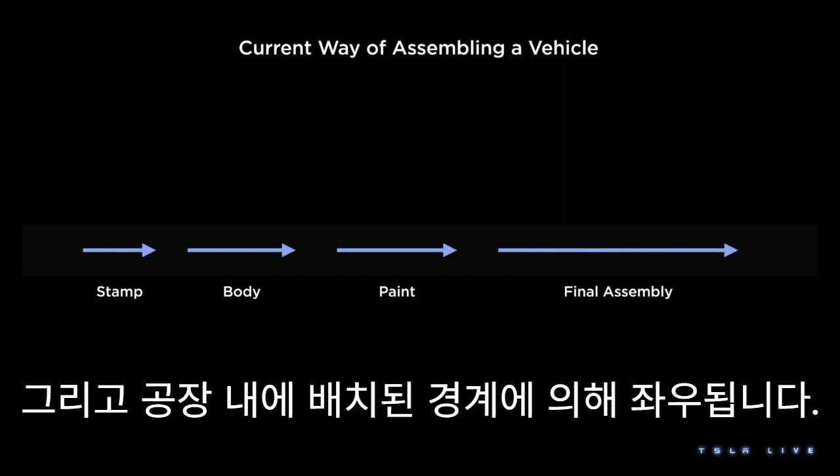The traditional way of making a vehicle is this: you stamp it, you build a body in white, you paint it, and you do final assembly. What's interesting is these shops are dictated by the organizational structures that exist, and they're dictated by the boundaries that exist in the factories that are laid out. If something goes wrong in final assembly, you block the whole line, and you end up with buffering in between. This is at the tail end of its manufacturing optimization.

Henry Ford first invented this assembly line in 1913. It's been 100 years, and it's really hard to make a change after 100 years. And when you watch it happen, it's actually really silly to a guy like me.

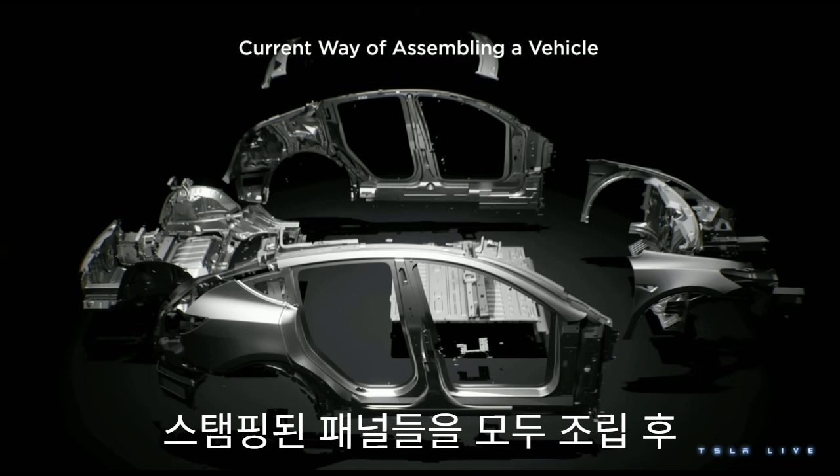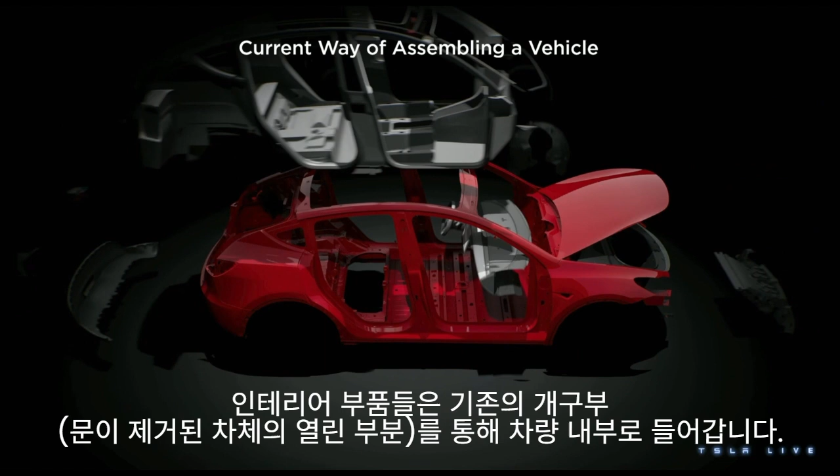You take all these stamp panels, you put them together, then you put them in a framing station, you build a body that looks something like a car, you put the doors on, and then you paint them. Once you get the color, you take the doors off, and then you start putting the interior inside the car. It comes in through the openings that already exist. I wish it went in like one big piece, but there's actually people coming in and out of the car—there's awkward movements. Then we lift the car up, we put stuff from underneath it, we put it down, then we put the seats in the car, and finally, we close it all out with glass, and we bring those doors that went away for a trip, and we put them back in the car.

Most of the time, we're doing this with a big, giant car and moving it and doing really nothing to it at all. What's funny, though, in this whole process is that just recently, Toyota called this an engineering work of art. True.

The Model Y—that was humbling, but at Tesla, it's not good enough. If we're going to scale the way we want to do, we have to rethink manufacturing again. As part of the master plan, we have to make another step change in cost. We started this on Model Y when we made these huge gigacastings, and we deleted hundreds of parts.

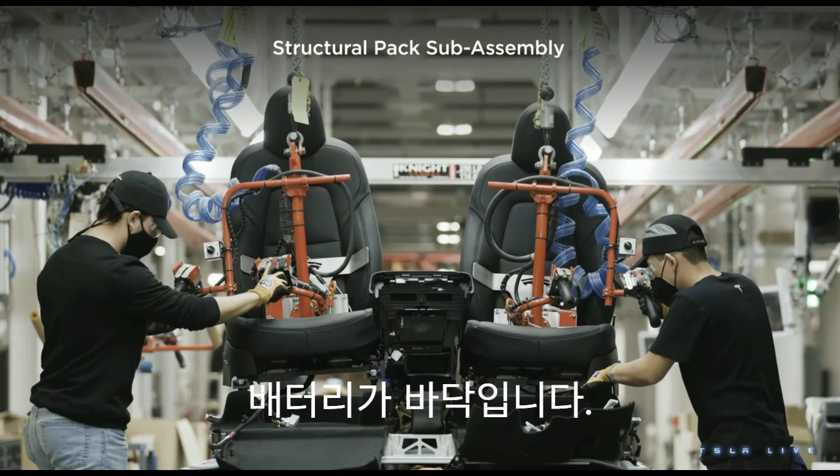We simplified assembly with the Model Y structural battery, where we decided the floor should be a part of the car—the battery is the floor. We put the seats and the interior on the battery, and we bring it up through a big open hole, and we assemble it. This allowed us to do things in parallel, fully rethinking the process and reducing the final assembly line by about 10%. And we thought, maybe we could do this in other places.

Yeah, I mean, in a way, the constraints become part of the solution rather than a problem.

So when you think about what I'm trying to say, I really want to hammer this home. When you have a car that's about 5 meters long, and you have people working around it, like we did in Model 3, and we change that to this process where we take different parts of the car, and we can do more at the same time, like we did with the Model Y structural battery pack—what you see here is us doing that on the front part of the vehicle, or the rear part of the vehicle. That means we can get more people working on the car, or robots, working on it at the same time. That means we have better operator density, less time doing nothing.

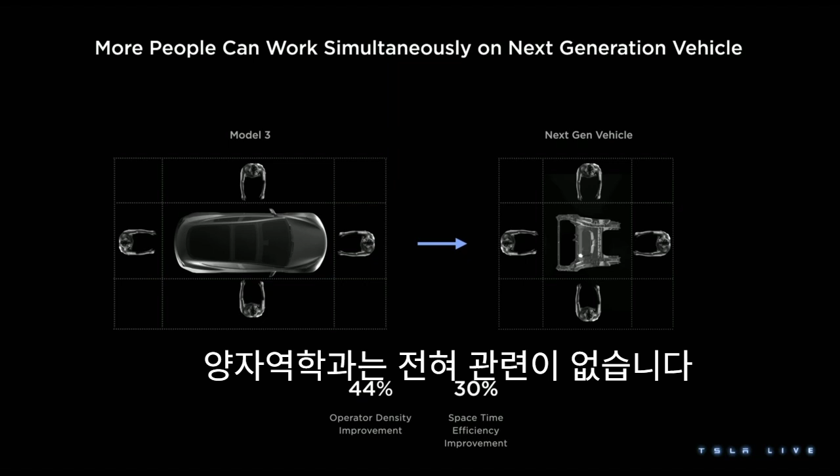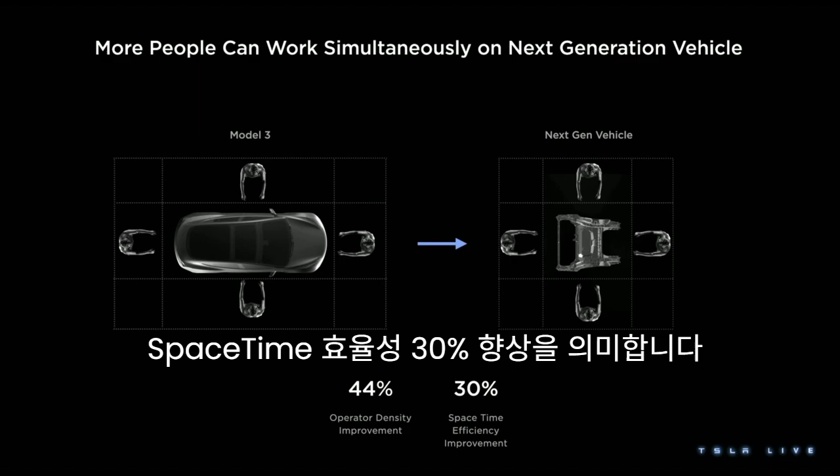I call that space-time efficiency. It has nothing to do with quantum mechanics—we can have that conversation later. But we get 44% more operator density, which means more work, less time walking back to the station, a 30% improvement in space-time efficiency. And because we're not building it in and out of the car with those slow movements of those robots I showed you from production hell, when we go to automate it, it's going to be a lot easier.

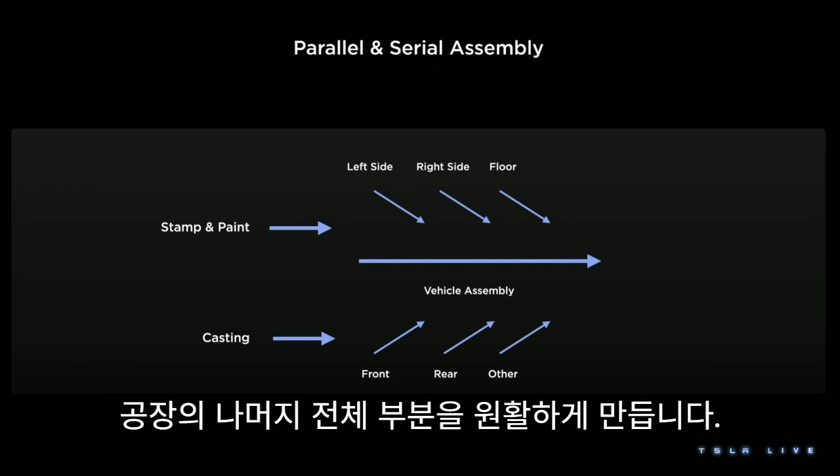In the end, that will probably look something like this, where we balance parallel and series manufacturing in a way where we only do things that are necessary, with a much shorter final line, blocking a lot less of the entire rest of the factory, so we can optimize material flow using the best practices.

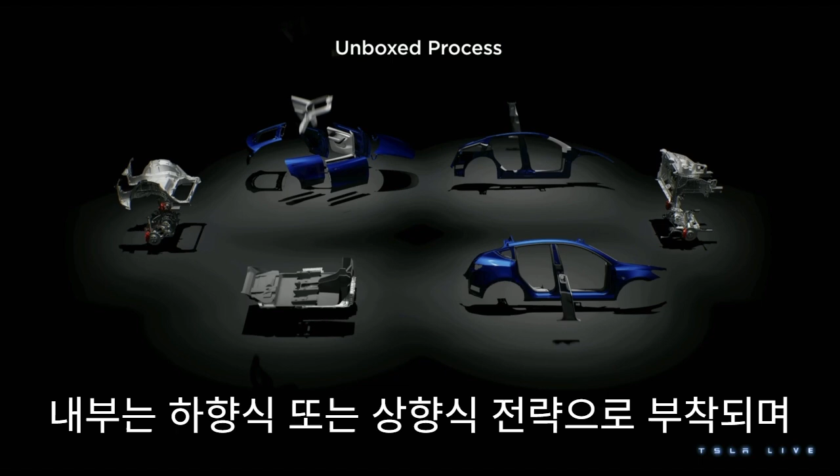What that means is it's going to look something like this, where we build all the sides of the cars independently, we only paint what we need to, and then we assemble the parts of the car once and only once, putting them where they need to go. The interior is attached from a bottom-up or top-down strategy, so there's more access for those robots and people. We aren't moving heavy objects around and doing nothing to them, and it means we're doing more work on the car more of the time.

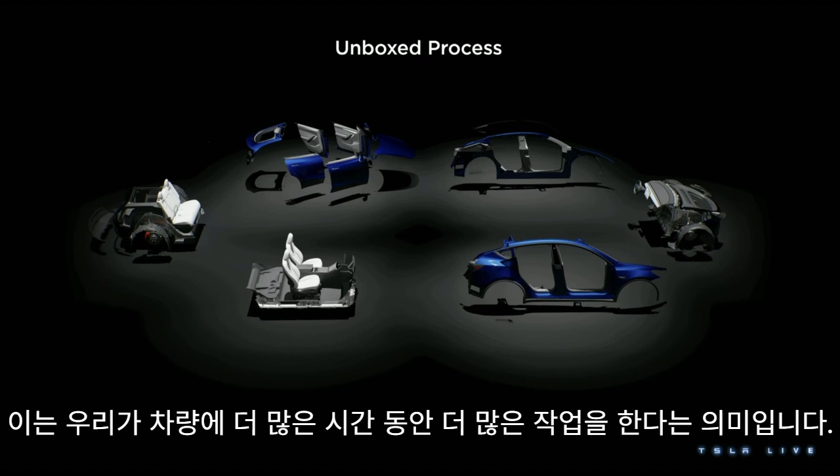Then when we take all of these tested sub-assemblies and put them together, we finally assemble the car only one time, putting the sides on with all of their parts to a front and rear that was already assembled, carrying the floor in with the seats, and finally boxing it out with the doors one time, just like Cybertruck. In the end, you get the same car, but it's not going to be a Model Y. This is a Model Y for illustration, not the next-gen vehicle.

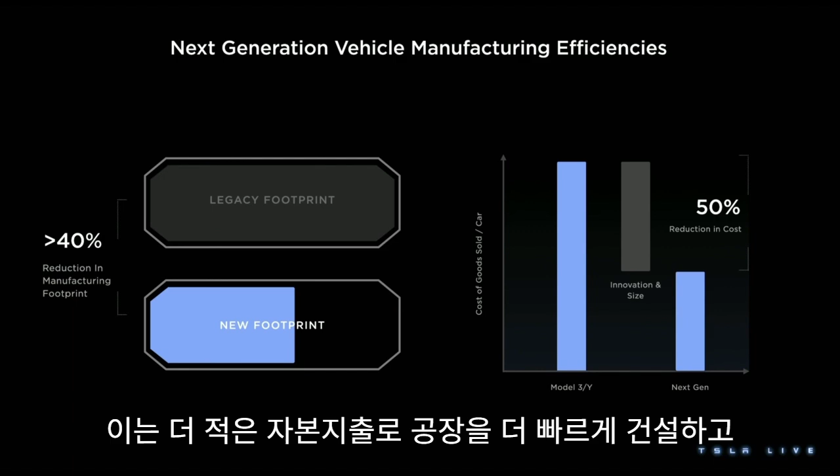In the end, what does that mean? To increase the scale and adoption of electric vehicles on the orders of magnitude that we just showed you, we have to make constraints part of the solution. It leads us to greater than 40% reduction in footprint, which means we can build factories faster, with less capex and more output per unit dollar.

Zach's going to go into more details on this later, but it also means through this innovation and some of what my other engineering colleagues are going to talk to you about in the future, we'll reduce costs as much as 50%. This is the 2-for-1 concept you hear me and Elon talking about on earnings calls.

I think our track record proves that we can deliver the best cars, and we deliver the best cars in spite of, and because of, these constraints. I'd love to really show you what I mean and unveil the next-gen car, but you're going to have to trust me on that until a later date. I promise we'll always be delivering exciting, compelling, and desirable vehicles, like we always have. Have we ever not? We always do.

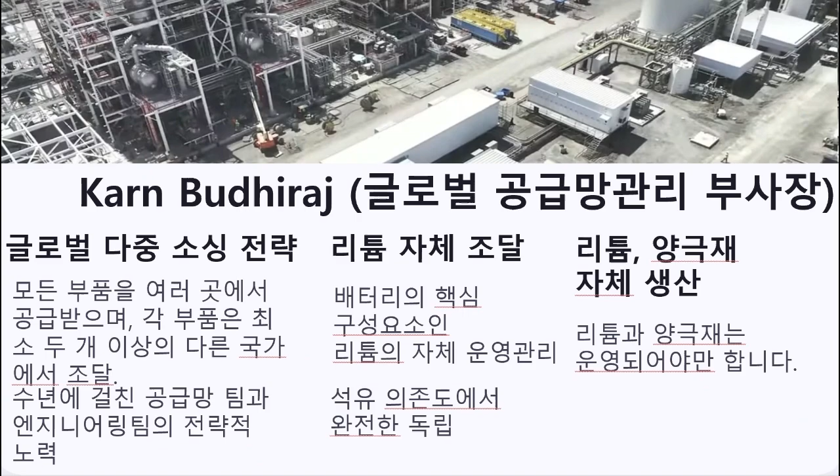일론: 셀 생산하는 걸 보게 되면 음극재, 양극재, 리튬 전해질, 분리막, 캔을 만들고 그 다음 셀 공장에서 이 모든 걸 합쳐야 합니다. 셀만 전문으로 제조하는 기업들이 있지만 그들은 리튬 정제나 양극재를 만들지는 않습니다. 우리의 셀 생산은 잘 진행되고 있습니다. 우리가 킬로와트아워당 가장 낮은 원가를 현재 기록하고 있다 생각합니다.

카른(글로벌 공급망 관리 부사장): 네, 우리가 북미에서 구매하고 있는 모든 셀들에 대해 킬로와트아워당 가장 낮은 원가를 기록하고 있습니다. 일론: 모든 요소를 고려했을 때 우리는 킬로와트아워당 가장 낮은 원가를 기록하고 있습니다. 테슬라의 셀이 가장 경쟁력 있는 셀입니다.

차량용 배터리의 킬로와트아워의 경우 테슬라의 배터리 셀은 공급업자의 셀 대비 원가가 더 낮습니다. 카른(글로벌 공급망 관리 부사장): 올해의 계획은 이를 기반으로 발전하는 겁니다.

가장 낮은 원가를 달성하는 건 제조 분야에서 가장 어려운 난관입니다. 하나를 잘하는 참신한 제품 만드는 건 상대적으로 쉬우나 대량 생산 및 낮은 원가의 무언가를 만드는 건 정말 너무나 어렵습니다. 우린 대량 생산 능력과 가장 낮은 원가 경쟁력을 기반으로 사이버캡, 더 저렴한 모델 등의 신제품을 위해 여러 영역에서 성능을 추가하고 있습니다.

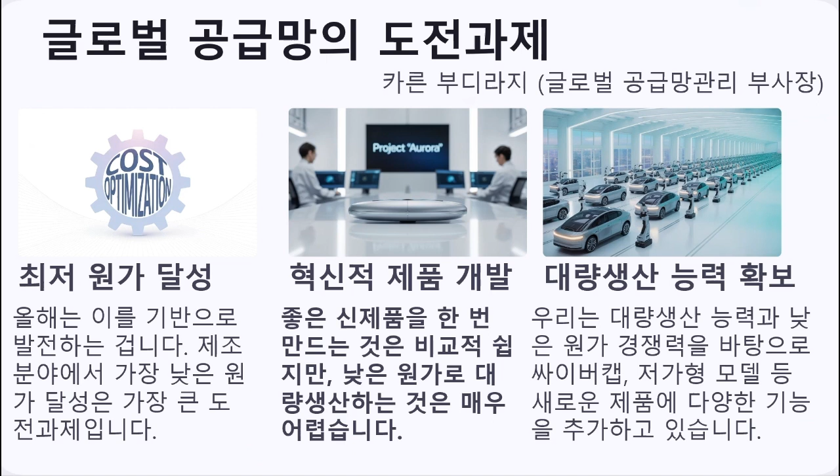일론의 발언을 요약해보면 테슬라가 관세, 정치적 편향 등 글로벌 경제 리스크에 대응하기 위해 공급망을 최적화하는 전략을 설명했습니다. 북미 85%, 상하이 95%, 배터리 제한 베를린 85% 수준의 현재 공급망을 구축하여 관세 및 정치적 리스크를 완화하고 있다 평했고, 리튬과 양극재 사업 진출, 그리고 자체 셀 생산 등으로 헨리 포드 시절 이후 가장 높은 수준의 수직 통합을 달성했다 언급했습니다. 모든 부품을 최소 2개 국가에서 조달해 공급망 리스크를 분산했으며, 북미 최저 킬로와트아워당 비용의 배터리 셀 생산 및 테슬라 셀이 외부 공급업체 셀 대비 원가 경쟁력에 우위가 있다 발언했습니다. 팬데믹 전후로 공급 다변화, 첨단 분석, 지역 파트너십을 통해 공급망의 회복력을 강화했고 이를 기반으로 신제품 성능 개선 계획까지 밝혔습니다. 저비용 대량 생산이 제조의 핵심 과제이며 테슬라는 이를 달성하며 동시에 혁신을 추구하고 있다 밝혔습니다.

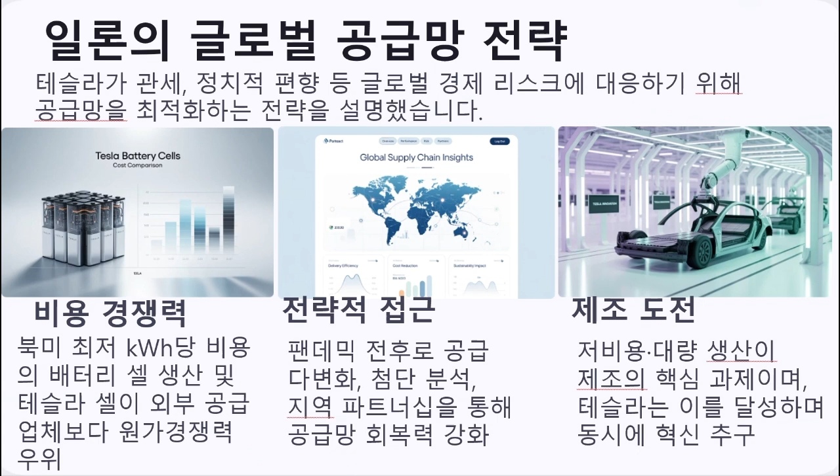유일한 선택은 비용을 많이 들이거나 신속하게 처리하는 겁니다. 지역화는 공급망의 안정을 가져다 줍니다. 만약 한 지역이 중단되면 다른 지역이 보완해 줄 수 있습니다. 공급망의 지역화를 구축하는 초기에는 많은 작업이 필요하나 공급망 차질이 발생하여 필요할 때 갖춰야 할 정말 중요한 겁니다. 반도체처럼 특정 분야 전반에 걸쳐 100% 지역화를 가정하는 건 비현실적입니다. 이런 경우 테슬라 팀은 전략적 비축분을 확보하고자 파트너사들과 긴밀하게 협력하고 있습니다. 중단이 생산에 영향을 미치지 않도록 하며 해당 특정 상품에 대한 지역 제조를 구축합니다.

1분기 어닝콜 12편 마무리하겠습니다. 옵티머스의 급격한 개선, 사이버캡의 대량 생산 준비, 그리고 옵티머스의 투입을 현실화시켜줄 언박스드 프로세스, 퍼즐의 조각들이 하나하나 이어지고 있습니다. 테슬라의 지역화와 수직 통합 전략은 관세, 정치적 편향 등 글로벌 리스크를 완충시키고 있습니다. 최저비용 배터리와 리튬 및 양극재 시장 진출에 이어 음극재도 고민 중이라는 테슬라의 미래가 기대됩니다. 감사합니다.